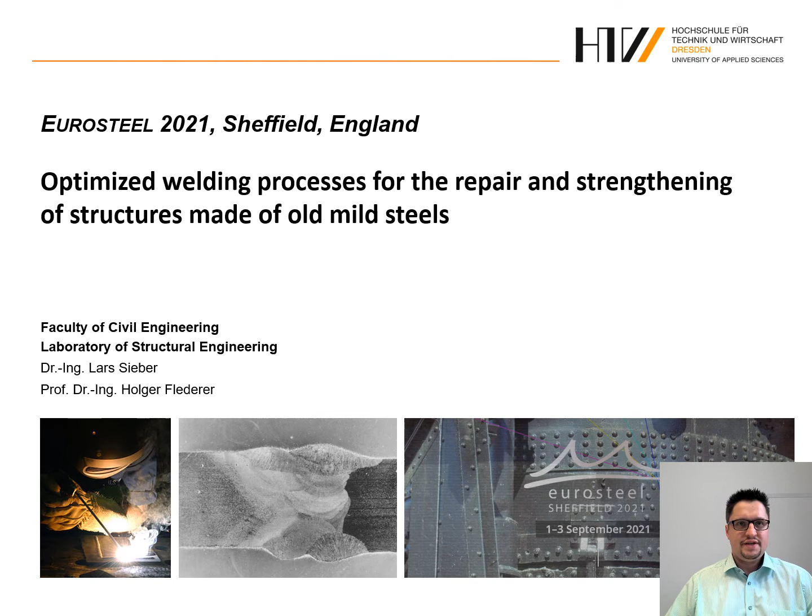I was very much looking forward to the conference because beside interesting presentations here, I also wanted to visit the Kelham Island Industrial Museum, which has a Bessemer converter, which you can see here. It's one of the last three worldwide.

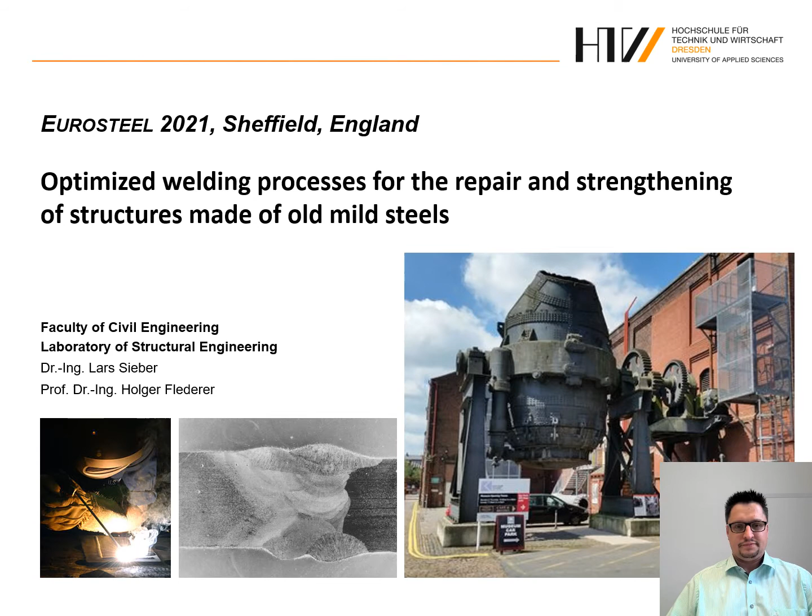The Bessemer steel, together with the Thomas steel, which was widely used in Germany, belongs to the group of old mild steels refined by air in a converter.

Due to the refining by air, a high content of nitrogen was introduced in the material, and this causes a tendency to embrittlement, which we call aging.

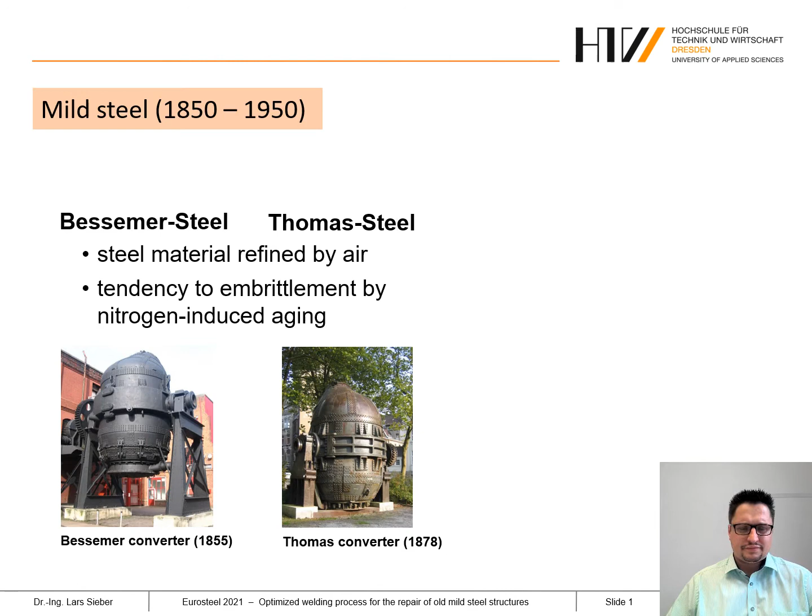And the second type of old mild steels are the Siemens Martin steels. These steels were refined in an open hearth furnace, and this process was much more time consuming than the first one, but it was able to produce higher qualities due to less impurities.

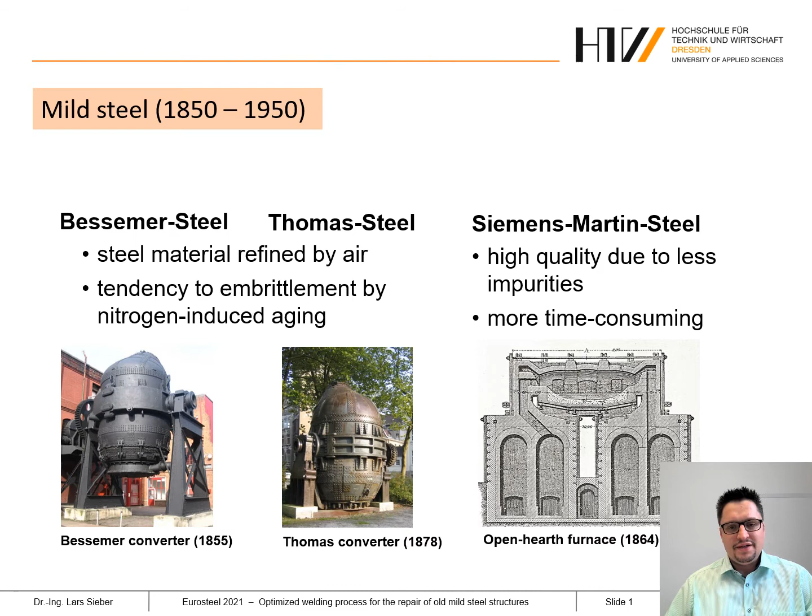All these two or three materials, in the 1930s and 1940s, were rimmed steels with a typical segregation zone in the middle, as you can see here, and also a perfect outer rim at the surface of the cross sections. To weld in this outer rim is very easy because you only have to assure that you don't melt this segregation during the welding.

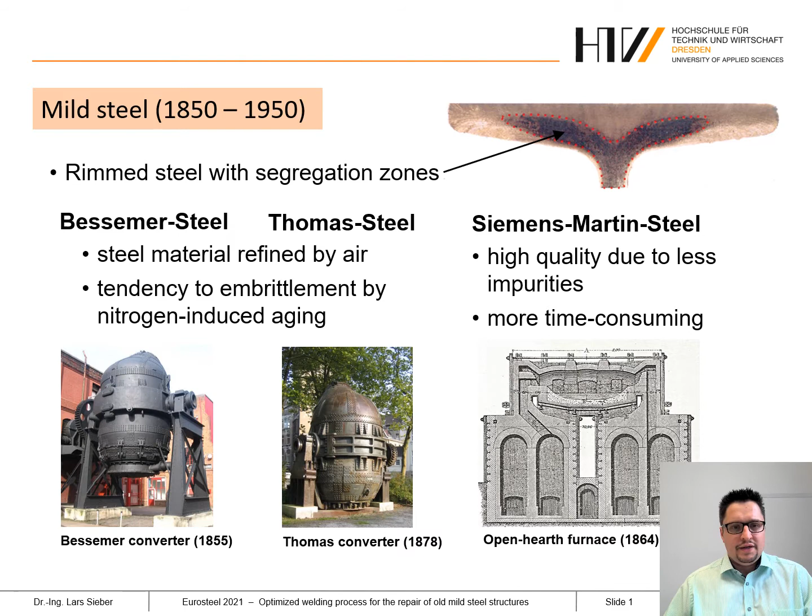We have intensively studied the butt welding of these old materials over 3 years. At the last conference, the last Eurosteel conference in Copenhagen, I was able to present the very first results of this research project. From almost 30 materials, we selected these 6 materials you can see here in this table for our investigations.

From different years of erection, also different types of material, types of cross sections, steel plates, as well as angle sections and so on.

And all these 6 materials are typical Thomas steels with a high content of phosphor, which is very typical for Thomas steels, but also high contents of sulfur, and typical for all the converter steels, the high content of nitrogen, which causes this aging effect.

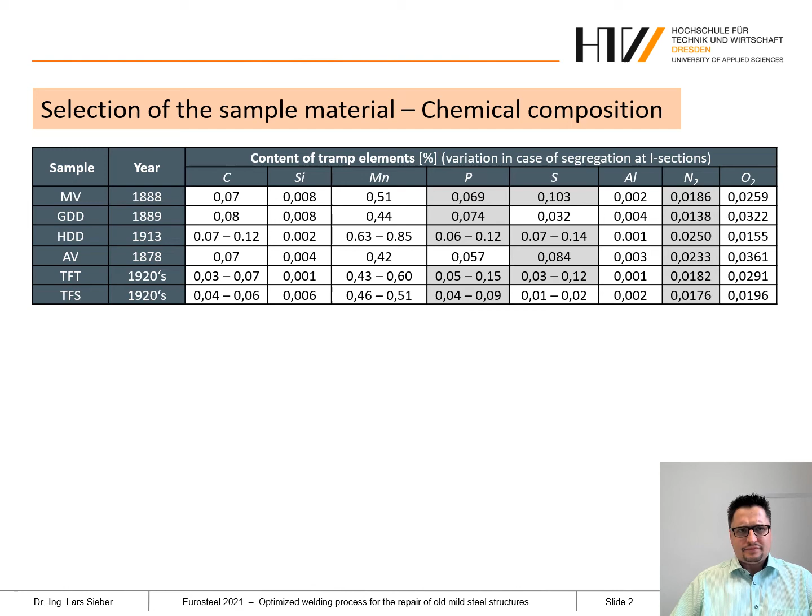At the beginning, we started with very favorable welding conditions for the butt welding. That means we used only basic coated stick electrodes with a small diameter, 2.5 millimeters, because these basic electrodes slag the impurities in the segregation zone and provide proven high toughness of the welding material.

We only welded, as you can see here on the left, in flat position, the butt welds, and we performed only multipass welding with stringer beads to reduce the residual stresses in the welding and also to normalize the lower beads.

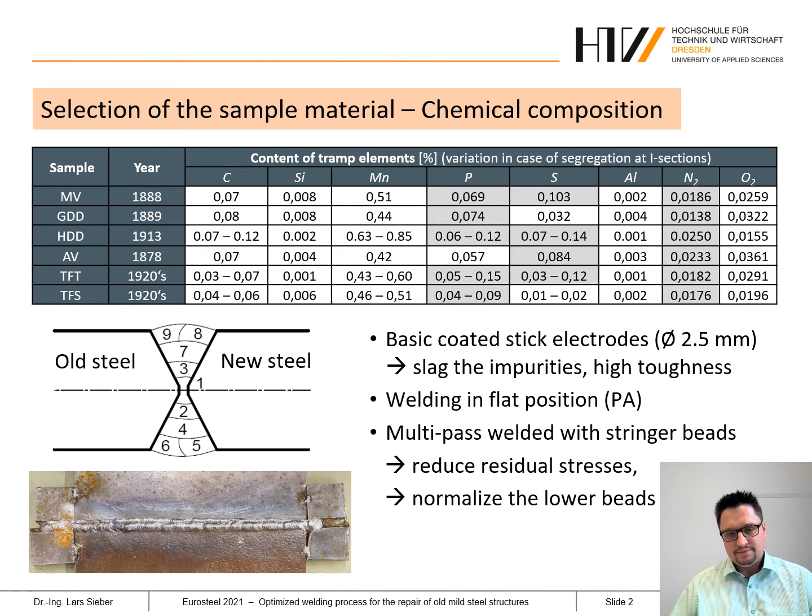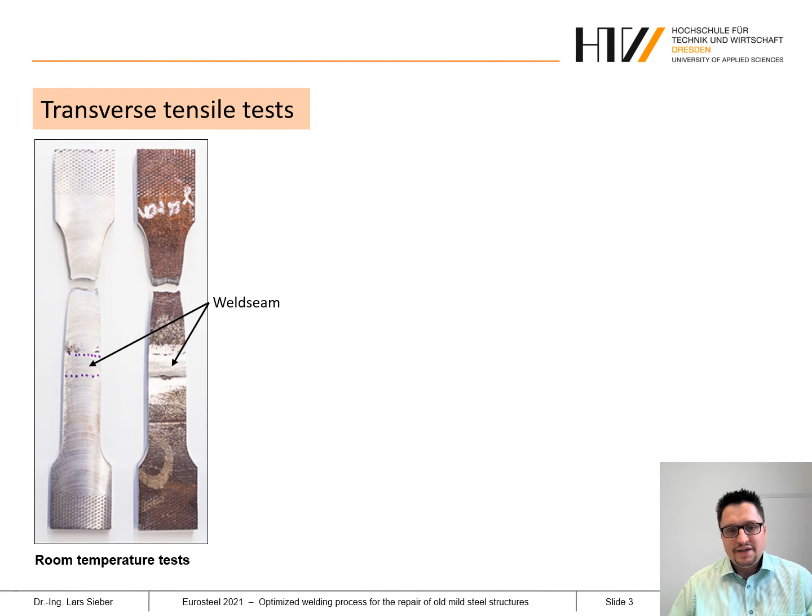This fracture behavior also occurred in all further experiments over the 3 years, including the tensile tests at lower temperatures, which you see here at minus 25 degrees Celsius.

This means that the strength and also the ductility in the heat affected zone as well as on the weld itself must be higher than in the base material.

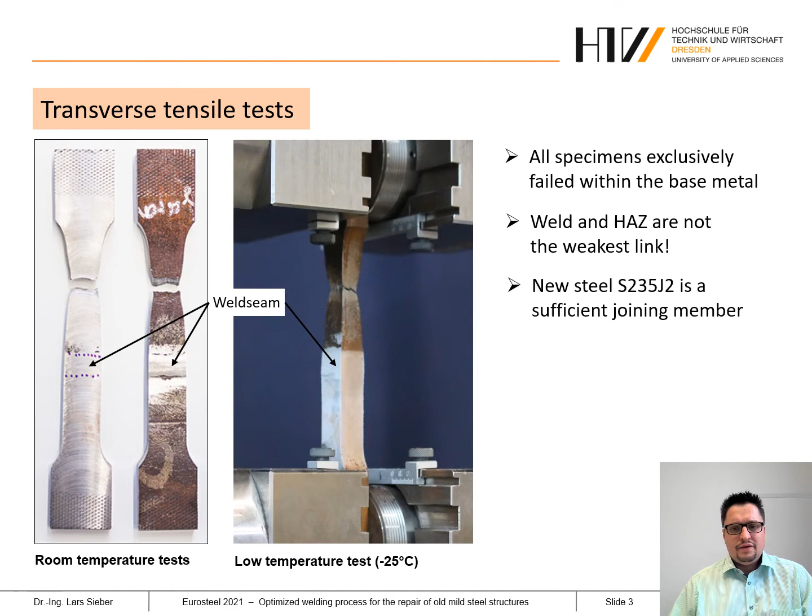On my last slide in Copenhagen, I also presented the reason, or first idea, for this higher strength and ductility in the heat affected zone.

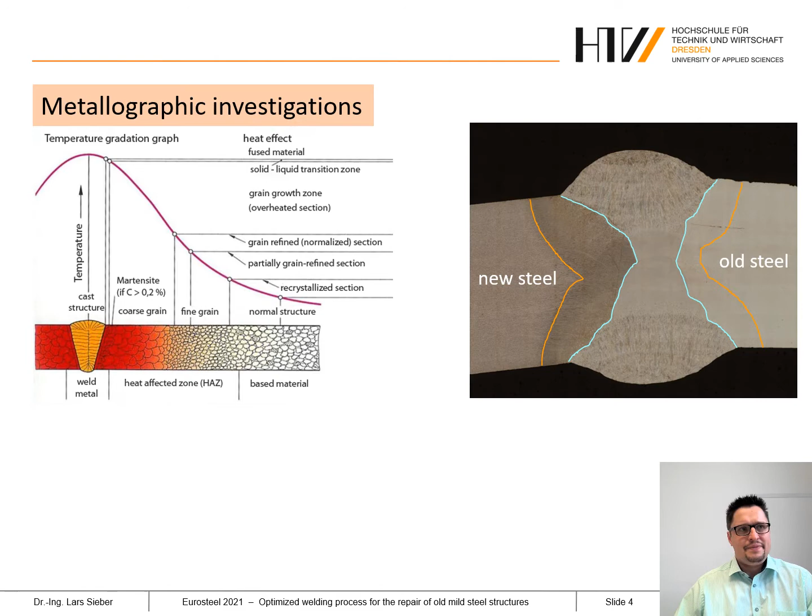And in metallographic investigations, we had found that a continuous grain refinement occurs, you can see here, from the base material up to the welding line, without any coarse grain formation.

We had to achieve this by limiting the thermal energy introduced during the welding by using the basic electrodes, by performing these stringer beads, and so on.

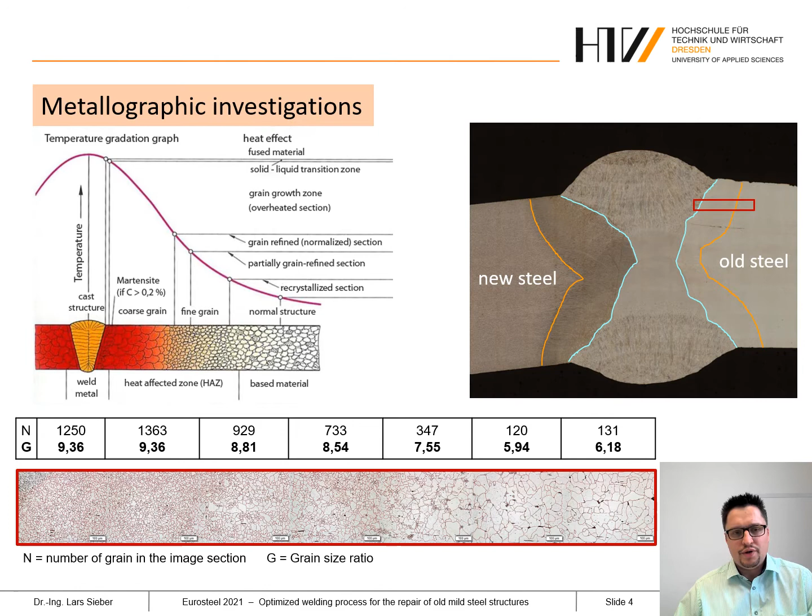And this made it possible to almost completely suppress the grain growth zone, which is typical for modern welding processes with a higher deposition rate.

During the following investigations in the following 3 years, different welding samples were produced and also analyzed. These included different seam types,

different welding positions, vertical position. We started with a flat position only, and we also analyzed easier to process welding electrodes, for instance rutile basic or rutile electrodes, and also other suitable welding processes such as flux core welding.

In each case, acceptable welding parameters could be identified to avoid significant grain growth in the heat affected zone, as you can see here on these 4 pictures.

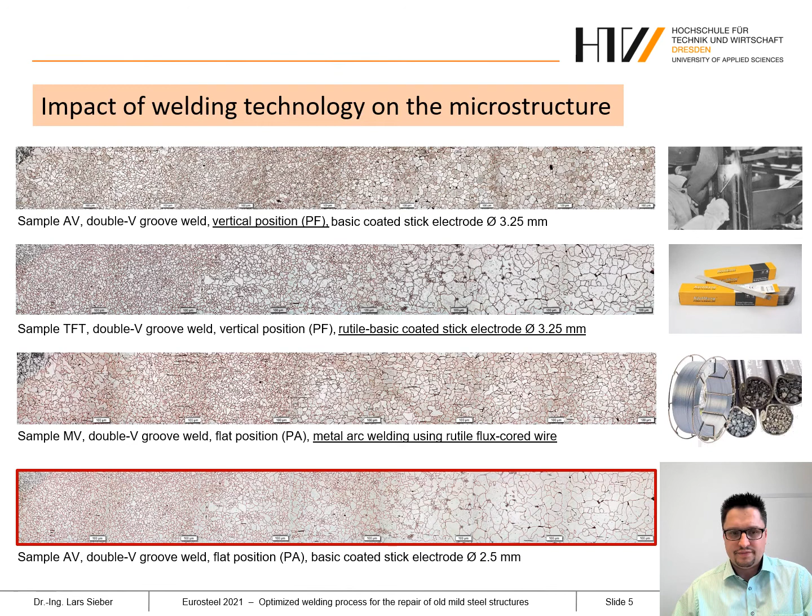To evaluate the ductility of the welded joints, the toughness was analyzed in Charpy impact tests. The toughness of the unaffected base material was determined first as a reference value.

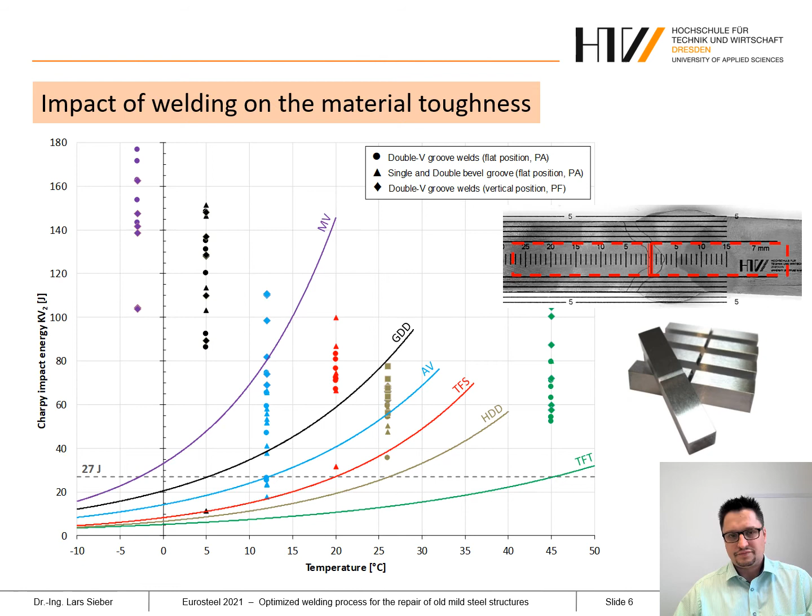As I explained in the beginning, especially the converter steels, the Thomas and also the Bessemer steel, have a high content of nitrogen. The iron nitrides degrade during welding in zones heated above 620 degrees Celsius, and the embrittlement due to the aging process is reversed.

It can be assumed that the aging process starts again after welding and the toughness decreases again. In order to assess this effect, we use artificially aged samples, which means they are heated to 250 degrees Celsius over an hour.

We fabricated from the heat affected zone of these samples new Charpy impact specimens and analyzed them. This you can see here in this diagram.

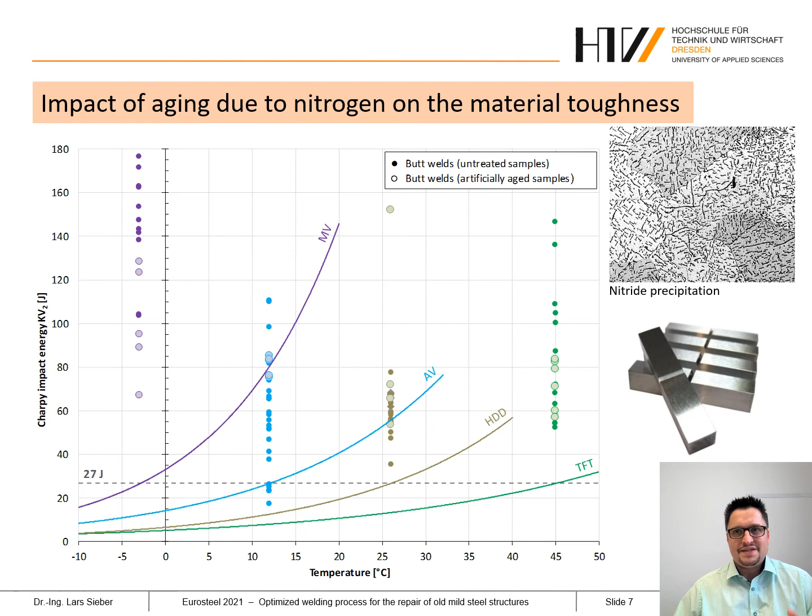Obviously, the average toughness of all these analyzed samples decreases due to the artificial aging, but it is still significantly higher than in the unaffected base material.

In the meantime, we had the opportunity to apply our findings from the research project to the rehabilitation of several old steel structures. Let's take a look at one of these examples. In the corresponding paper, you will find another one, or two other ones.

At a small old railway bridge, the upper chord of the main girder had been heavily corroded, especially near the bearings. Instead of a complex strengthening, we decided to replace the damaged parts by butt welded new plates, based of course on a metallographic and chemical analysis of the old materials.

As you can see here, the adjacent rivets were removed to be able to lift the chord plate and to use a ceramic welding backing for the root weld, because we were not able to weld in a double groove like in the other experiments.

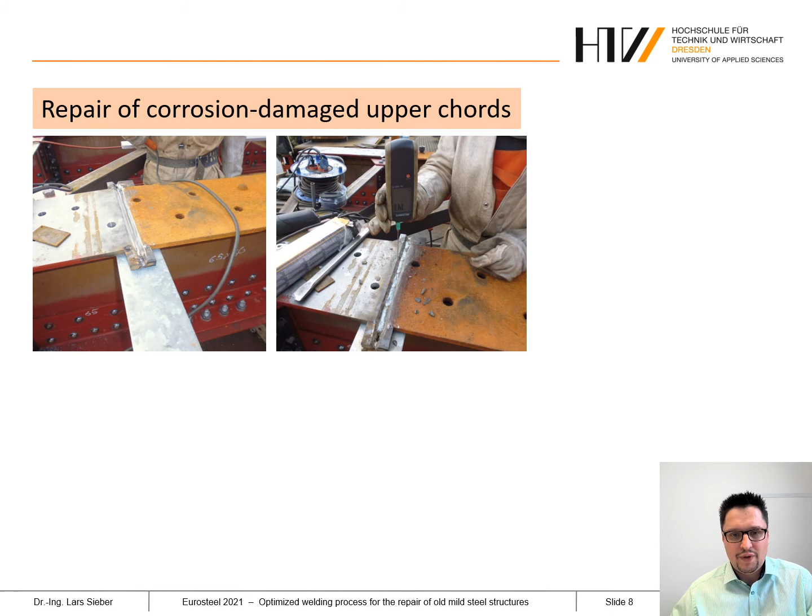As you can see, the groove here, also here, was welded by stringer beads, one direction, and also in flat position. Here, the welder checks the interpass temperature to minimize the heat input into the material and to avoid coarse grain formation.

And finally, after cutting the welded ends here, the welding ends, the plates were bolted up to the upper chord of this structure.

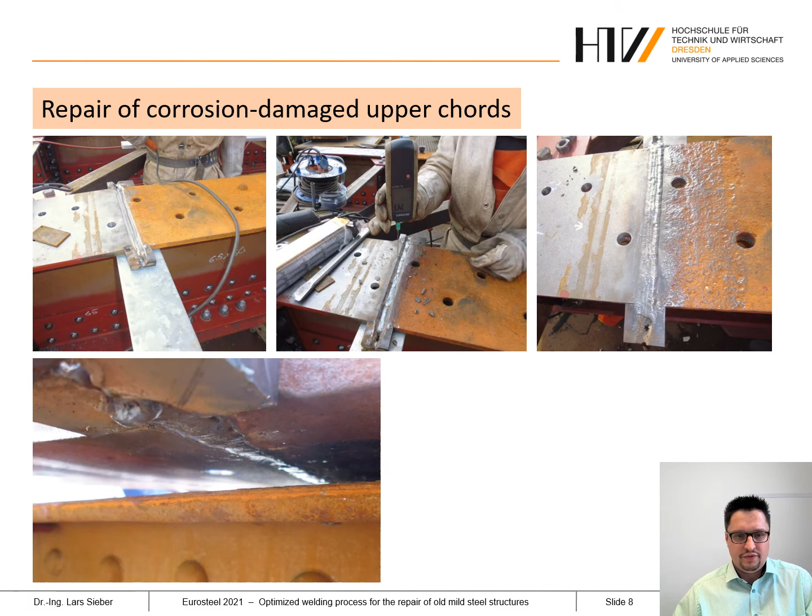Let me summarize the findings of our research project. The current estimation in current guidelines or the literature that old mild steels are generally not weldable is definitely wrong.

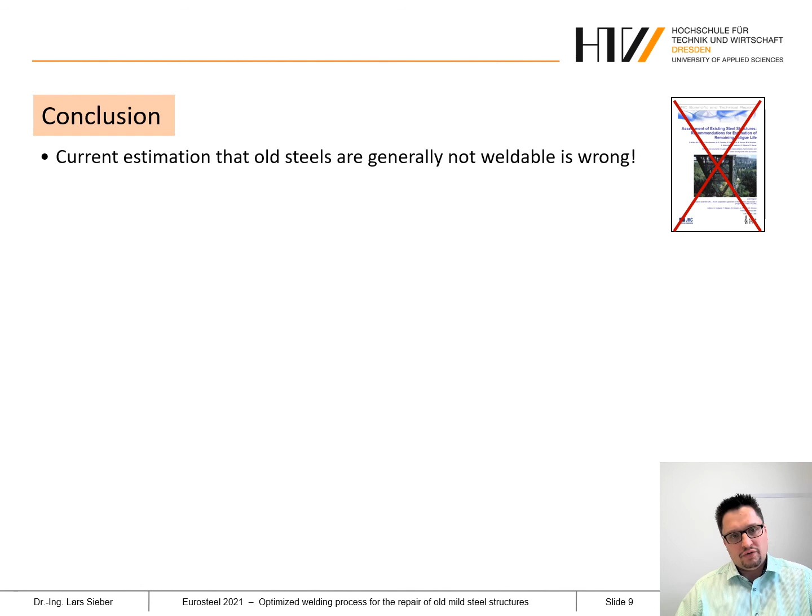Basic filler materials, basic stick electrodes, are able to slag the impurities. The limit values, which you can find here in this table, are recommended by us for old mild steel which is suitable for welding.

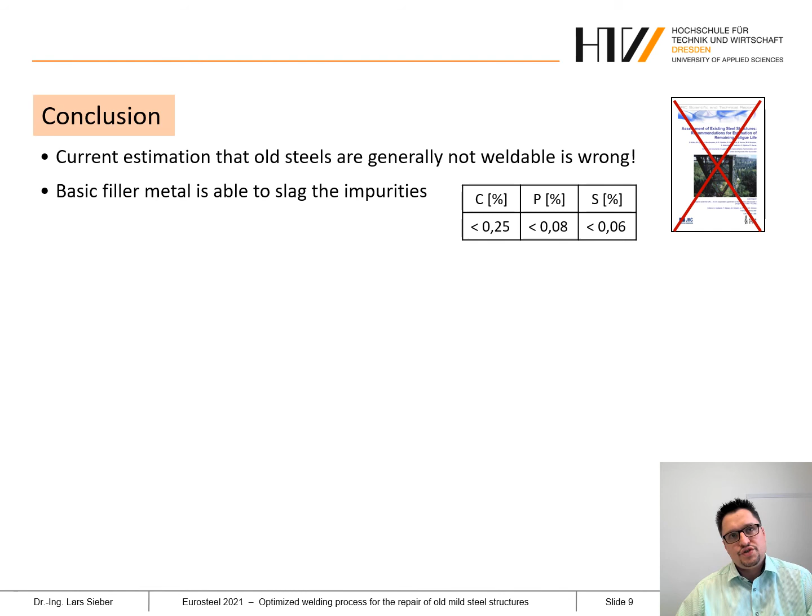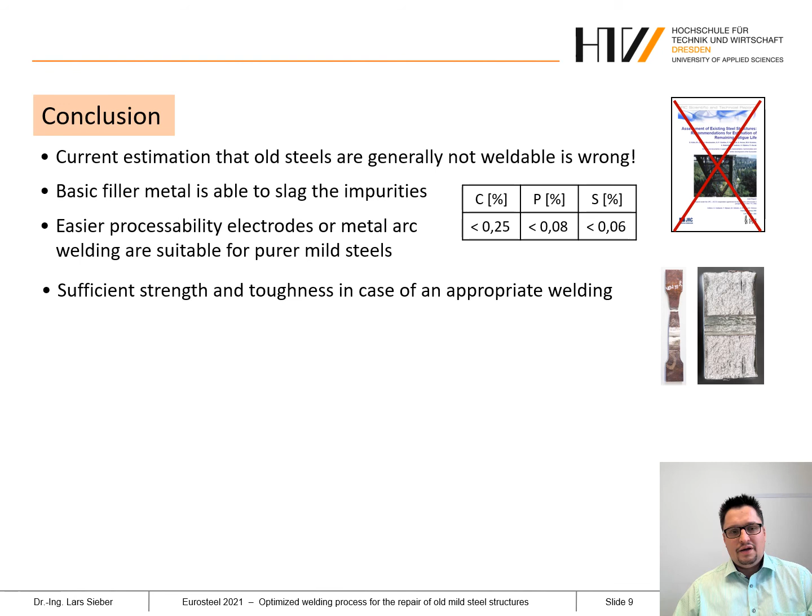It is able to reach a sufficient strength or toughness in case of an appropriate welding procedure. This means the weld seam should always be produced in a multi-layer technique.

That's it. We have to prefer the stringer beads, as you can see on the right here, instead of weave beads. Weave beads are only used in case of out-of-position welding, for instance vertical welding.

And the welding energy for each layer has to be limited to approximately 25 kilojoules per centimeter to avoid coarse grain formation in the heat affected zone.

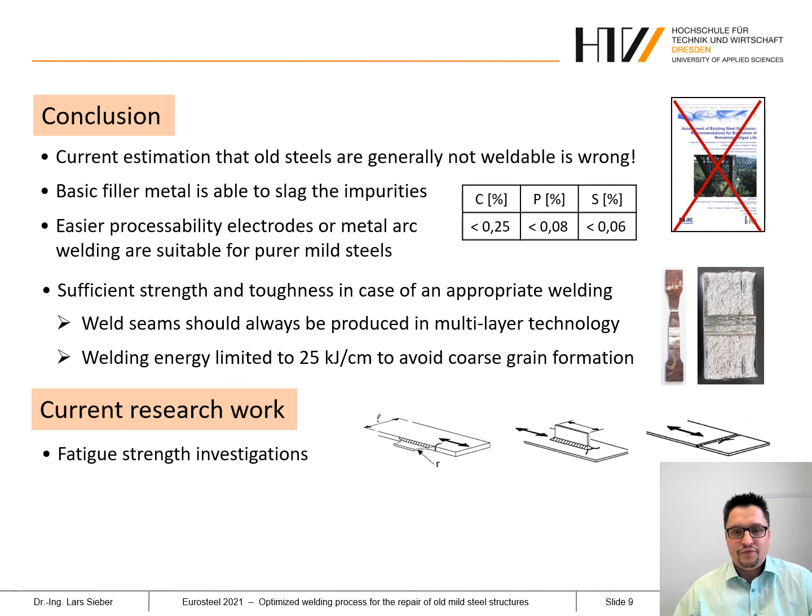Currently, we are working on two other topics regarding this subject. The first one is the fatigue strength of these welds at old steels for typical or relevant structural details. The second one is the influence of non-metallic inclusions.

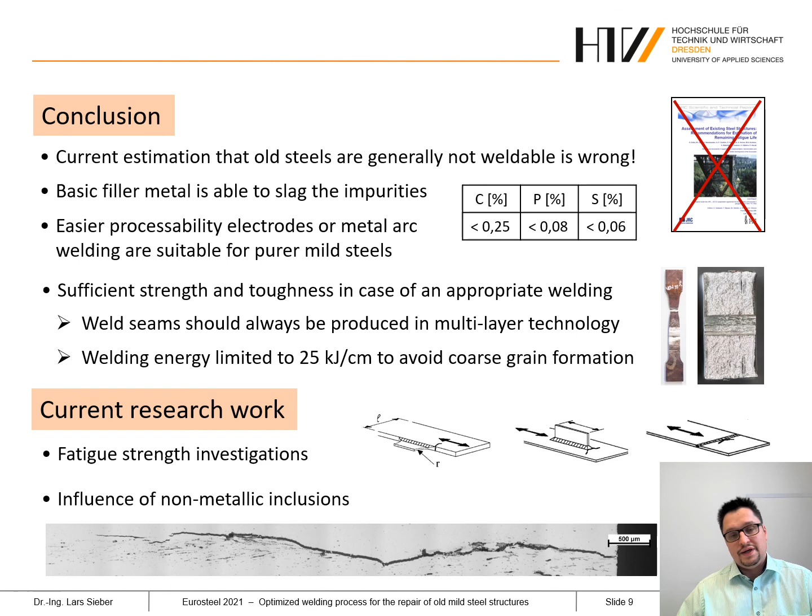This is more relevant for fillet weld connections, as you can see here, than in butt welds. But sometimes we find in old steels such huge non-metallic inclusions that will have an effect on the weldability.

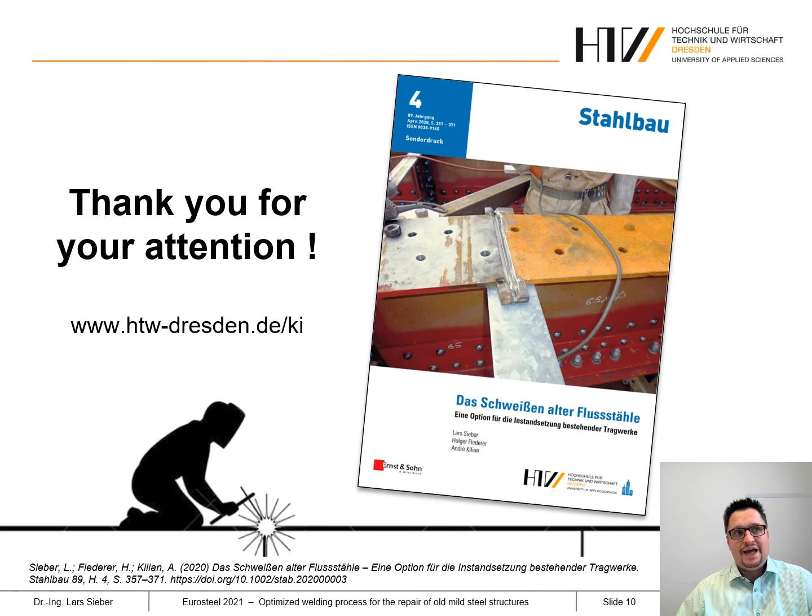Detailed information about all the results of our research project can be found in the corresponding paper, but also in this article in the German journal Stahlbau, which we published last year, and you can download this as a reprint at our homepage. Thank you for your attention.